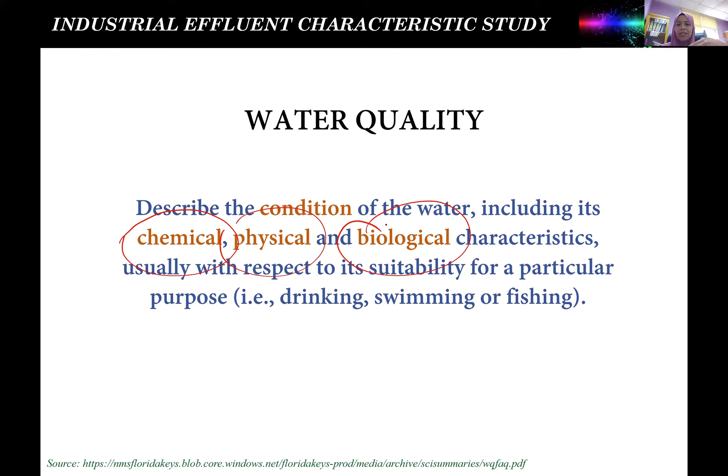Normally, pure water is tasteless, colorless, and odorless. What we call it, usually we call it the universal solvent, right?

When we do analysis, normally we focus on using the standard method for the examination of water and wastewater, we call it APHA. This is actually the standard analytical procedure that quantitatively measures the parameter and qualitatively reflects the impact of the impurities on water.

And if we talk about water pollution, it is actually defined as the presence of water impurities in certain quantities.

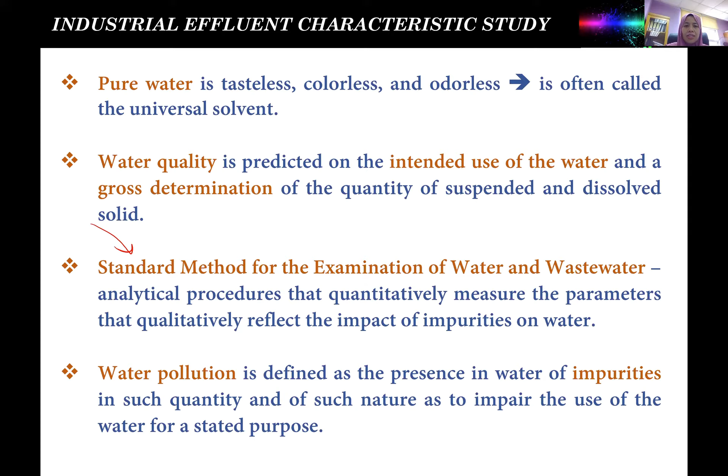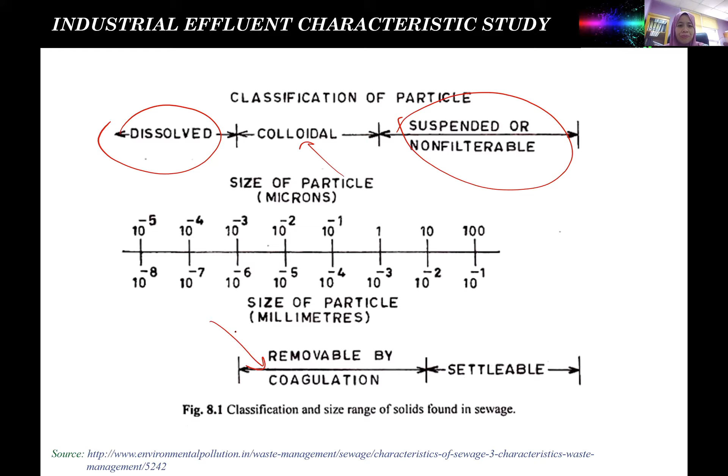Impurities in water, as we discussed before, can be classified as either suspended or dissolved form, and caused by surface nuclei during condensation. That's natural. The most important thing we need to focus on is human activities, industrial and domestic wastewater, for example from agricultural chemicals.

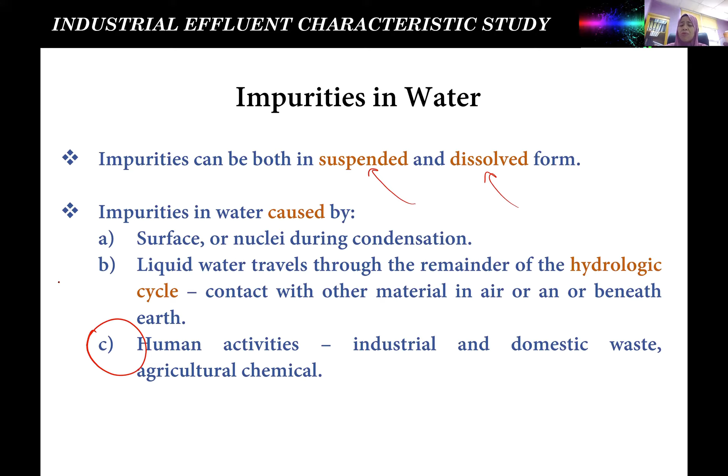So we go directly to the wastewater categories. We have physical characteristics, chemical characteristics, and biological characteristics. Normally, when you talk about physical characteristics, you can sense it, smell it, or see it.

For example, color, that is a physical characteristic. Odor is also a physical characteristic.

But when you talk about chemical characteristics, for example, something you cannot measure or evaluate directly from your naked eyes or smell, for example pH, that is actually a chemical characteristic.

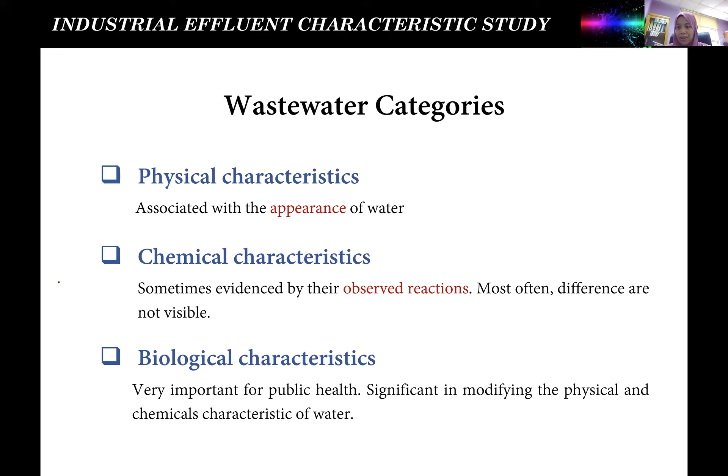Metal, you cannot see the metal inside the water, that is a chemical characteristic. And biological characteristics relate to bacteria and protozoa, for example.

So we go into detail on the physical characteristics. For example, we have temperature, turbidity, conductivity, solids, color, and odor.

So why do you need to measure temperature? The purpose of measuring temperature is actually for the design and operation of biological treatment. For example, if you have quite a high temperature, it will reduce the dissolved oxygen in the aeration process, in the biological process. That's why you need to consider temperature.

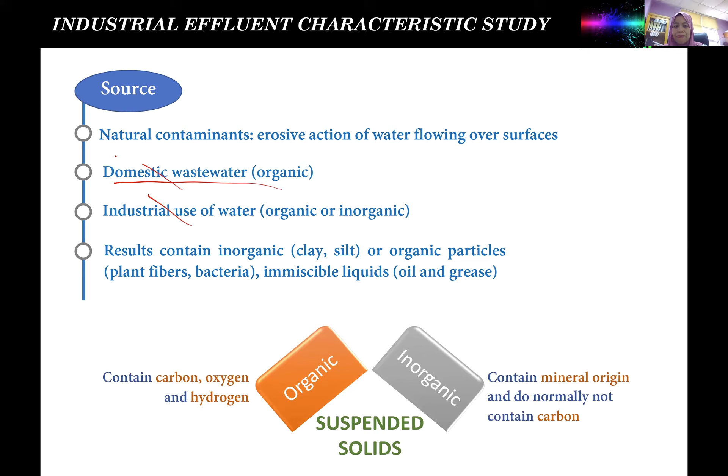Impact of suspended solids: aesthetically displeasing, provides adsorption sites for chemical and biological agents, and may be degraded biologically to produce byproducts. So we use suspended solid analysis to measure water quality and assess treatment processes.

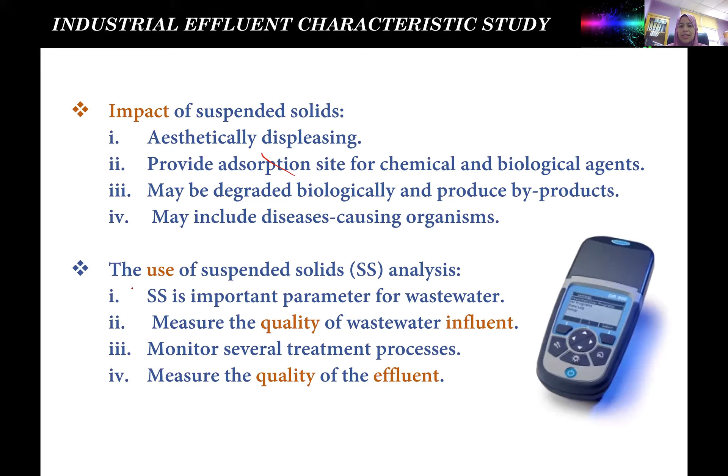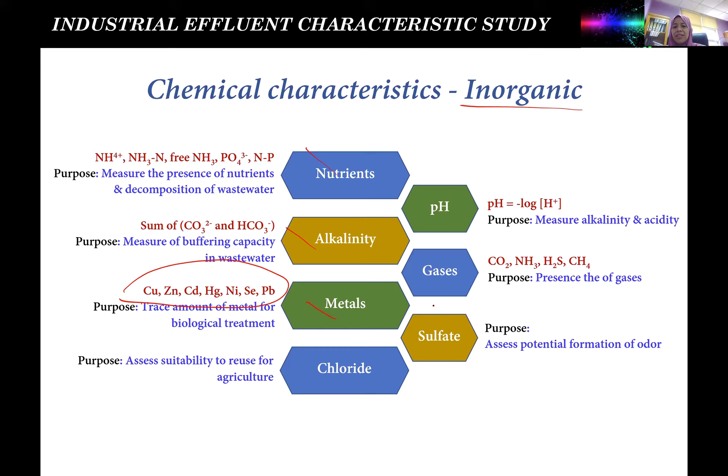That is for organic chemical characteristics. Now for inorganic chemical characteristics, for example nutrients, alkalinity, metals like cadmium, zinc, copper, chlorides, sulfate, gases, and also pH.

If you look into pH, most of you know how to measure pH concentration in wastewater. This is one type of pH sensor equipment we use, a portable pH meter. We normally use the portable pH meter so it's easy to go to the site and do measurements during consultation. In our lab we also have a benchtop pH meter that is more for research, but for consultation we usually use the portable pH meter because it's easy for us to move.

Wastewater with extreme concentrations of hydrogen ion is difficult to treat by biological means. For example, when there are extreme concentrations of hydrogen ion, it relates to acidity. It's very acidic, so you have to adjust the pH first to 7 before introducing this wastewater to the biological process, otherwise it will affect your bacteria in the biological process.

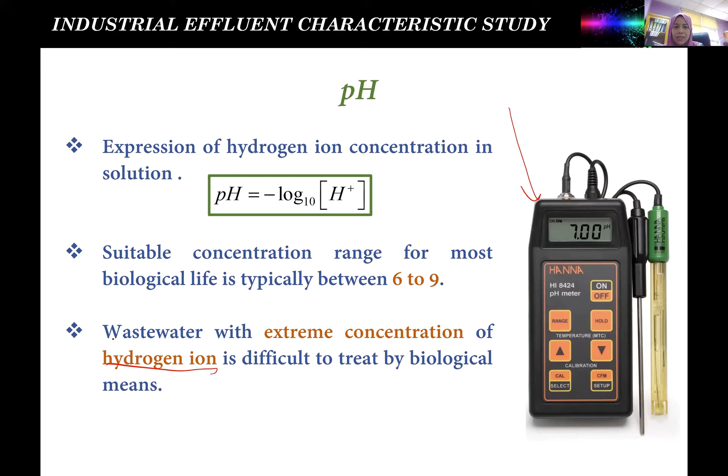Metals are a very challenging parameter to treat in the ITS or wastewater treatment plant. All metals are soluble to some extent, and excessive amounts may present a health hazard. Toxic metals are actually very harmful, although at very minimal concentration. For example mercury, although at very minimal concentration, is actually toxic.

Sources include natural ones, but what we need to control is discharge from industrial and agricultural wastewater. Normally we can measure metal concentrations using AAS, atomic absorption spectrophotometry, or colorimeter, or ICP. If using an APHA method, probably you can use AAS and also ICP. But for us, since we always do consultation at the plant, ITS, we use a handy colorimeter which we bring to the site to measure certain metal concentrations.

Not all metals can be measured using the colorimeter equipment; only certain metals can be measured with it. So if we need to measure a metal that cannot be measured by this equipment, we bring the sample to our lab, because our lab has the AAS and also ICP.

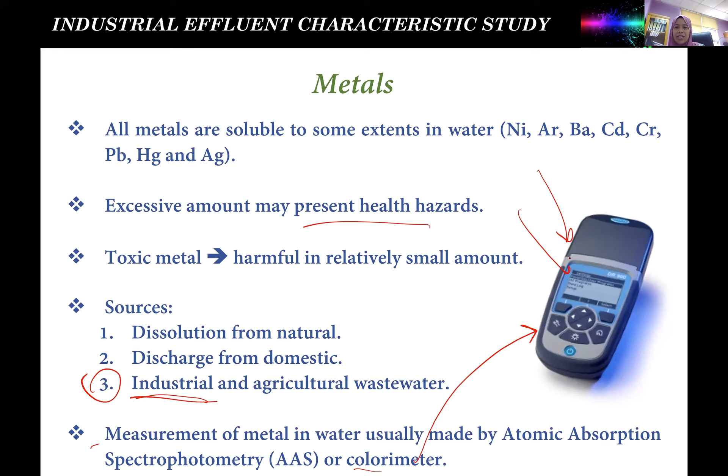This is total nutrient analysis and ammonia. This is actually a parameter that you need to control. It's quite challenging also to control and treat in the ITS, right?

Ammonia is actually a colorless, pungent gas, highly soluble in water. When ammonia dissolves in water, we call it ammonium hydroxide, NH4+, but actually we also have ammonia present by itself in the wastewater. So that is ammonia that we need to treat and remove from the wastewater, or as simple as we can call it, our parameter is ammoniacal nitrogen.

This parameter is also quite challenging to treat depending on the nature of your wastewater.

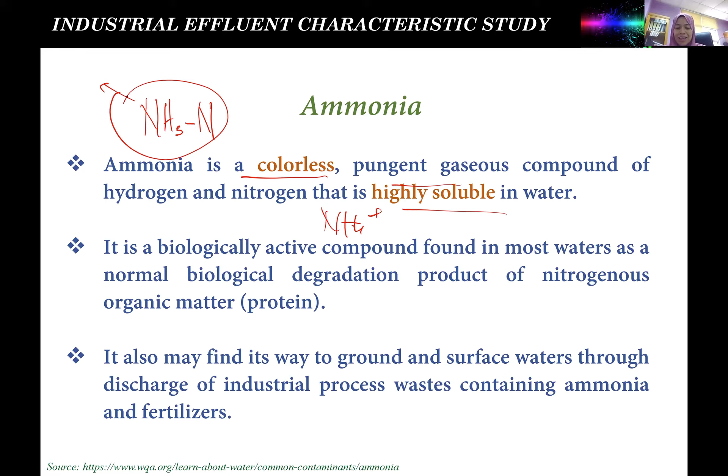Phosphorus is also one of the parameters we need to treat. Sometimes we also use phosphorus as a nutrient in the biological process, but excess use of phosphorus can also contribute to problems in the wastewater.

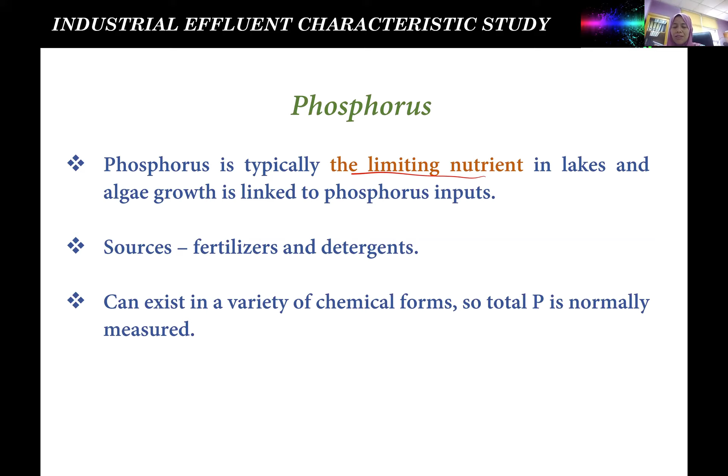Biochemical oxygen demand, BOD, is actually the concentration of organic material present in the wastewater, whereby this organic material can be degraded by bacteria.

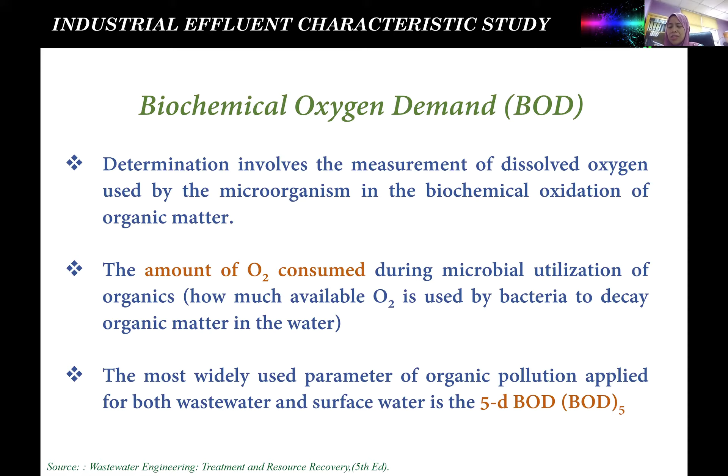So now it is COD. When you talk about COD, yes, COD juga adalah concentrations of oxygen used to decompose organic material. Organic material, either it can be degraded or non-biodegradable. Okay, so kalau kata BOD tadi, organic material yang boleh biodegrade sahaja. Tapi bila COD, dia akan ambil kira organic material either degradable or non-degradable.

So from theory, we know that the concentrations of COD is supposed to be higher as compared to BOD. As simply as we can say, BOD is the subset of COD. So overall in COD you have biodegradable and non-biodegradable. So this is for COD. But for BOD, you just have only biodegradable organic material that can be treated by using bacteria. So that is the difference.

The measurements of oxygen concentration for COD and also BOD is different also. For example, for BOD we are using bacteria. We need 5 days, let the bacteria degrade the organic material, and then we measure the DO before and after. But for COD, we will use a chemical, okay, potassium dichromate if I'm not mistaken.

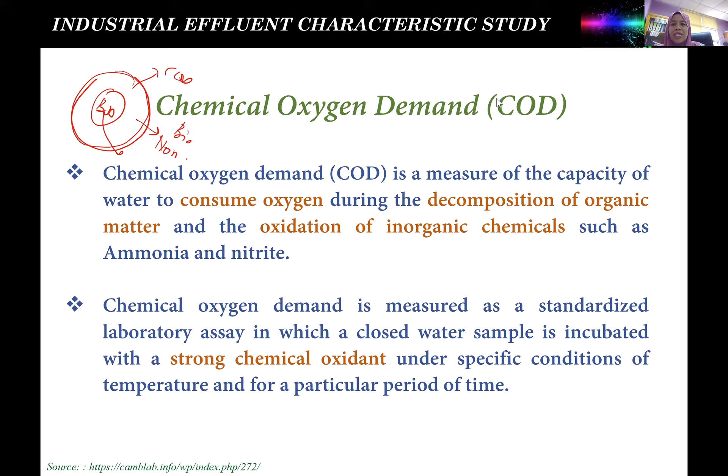Okay, so the commonly used oxidant in COD assay is potassium dichromate. Inilah kaedahnya, okay, kita akan bakar dalam COD reactor for about 2 hours, and kemudian kita akan test concentration tu dengan menggunakan colorimeter.

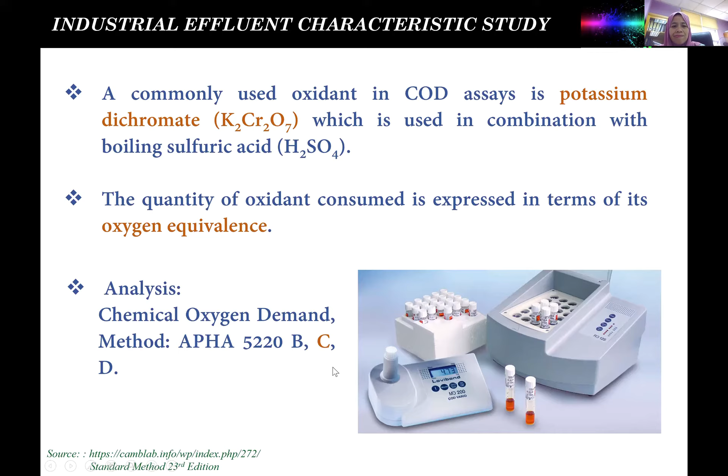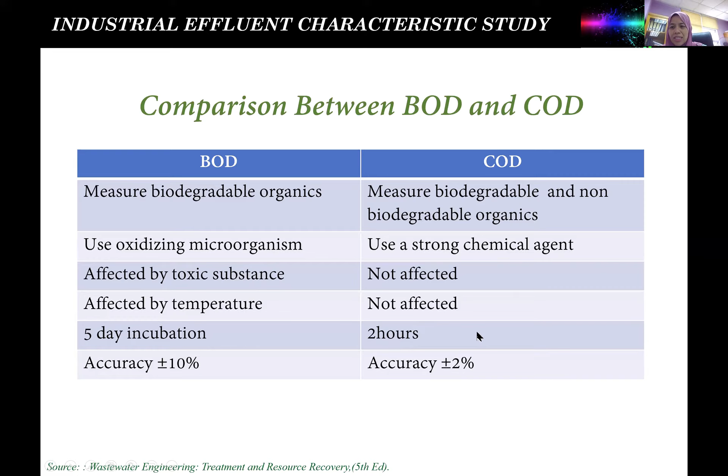So for biological characteristic, we have coliform organisms and bacteria, protozoa, viruses. Okay, so now we talk, that is water quality, okay, and water characteristic.

Now we talk about the industrial effluent characterization study, IECS. So what is IECS? It is actually to identify the quality of effluents, water quality, and it is conducted by professionals. We cannot simply ask any people to do the IECS study.

IECS should be conducted by professionals because there is a method of how to take the samples, okay, how routine, by hours, whether it is composite sampling or grab sampling. So there is a method to take the samples.

And normally in Malaysia, the analytical analysis only can be performed in an accredited lab. Kalau di Malaysia, SAMM meaning Skim Akreditasi Makmal Malaysia. Only this lab can do the analytical analysis and report, presenting the report in the certificate of analysis.

Although we in university have our own equipment, for example AAS, ICP, if our lab is not an accredited lab, the results are not accepted by the Department of Environment. They only accept the results from an accredited analytical lab.

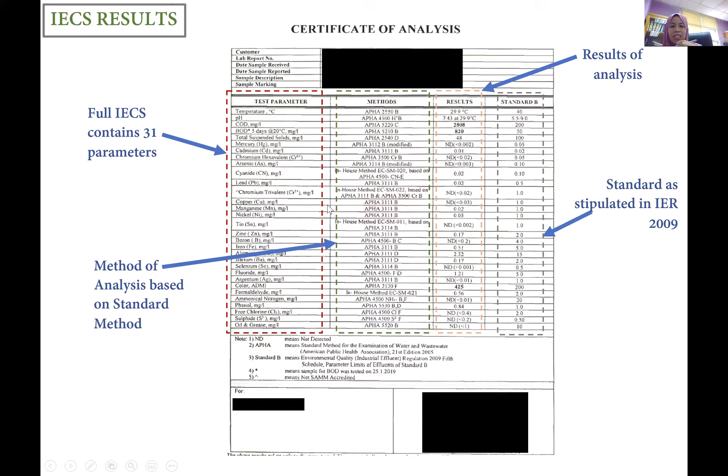So the IECS objective is actually to determine the physical, biological, and chemical characteristics and the concentrations of the constituents in the effluent. So we have the physical, biological, and chemical characteristics here.

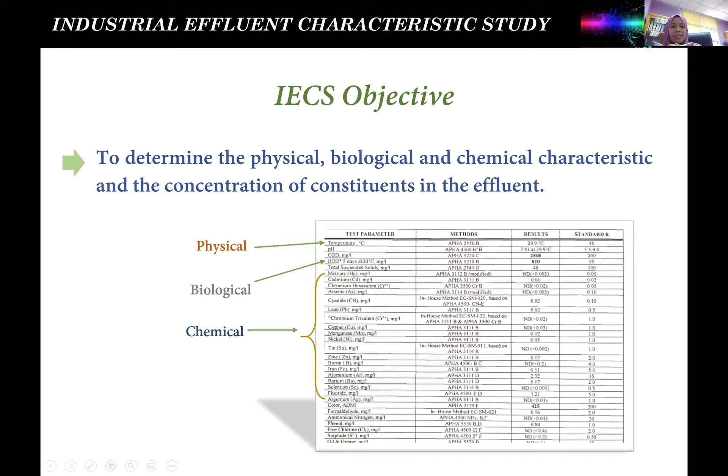And the other objective is to determine the best treatment method for designing the industrial effluent treatment system to comply with the regulation in Malaysia, IER 2009, as stated in the Act EQA 1974.

So normally this is for designing the new IETS. Normally in industrial effluent treatment system, we will have primary treatment, secondary treatment, and tertiary treatment.

Primary treatment is more focused on physical and chemical treatment. Secondary treatment is more focused on biological process. And the tertiary treatment is more focused on advanced treatment process.

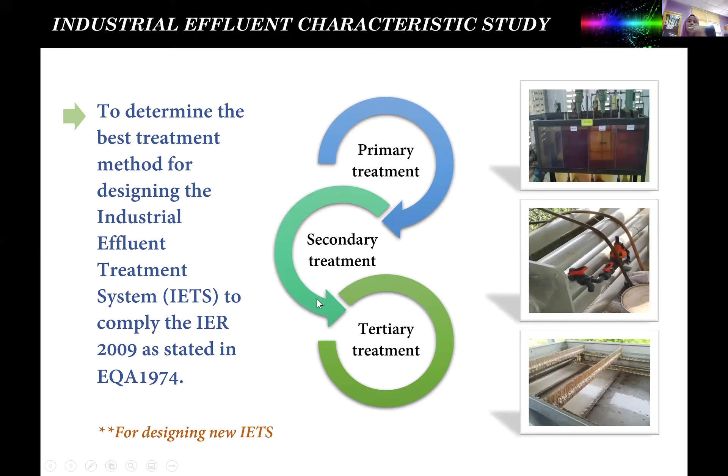So the last objective is to determine the effluent characteristics of the industry at current operations and compare them with the characteristics in the design stage. So for this objective, this is for new design of new IETS.

So for this objective, it is for upgrading the current ITS. For example, the ITS is already there, but the current process in ITS is not capable enough to treat the wastewater with the new current nature of wastewater, so you need to upgrade the current ITS or optimize it.

So what you do is conduct the IECS study, a characterization study, then do the calculations of the HRT, the mass balance, and evaluate the significant parameters. Lastly, from that evaluation, you can decide whether you only need optimization in your ITS or you need to upgrade your ITS. So that's the importance of the IECS study.

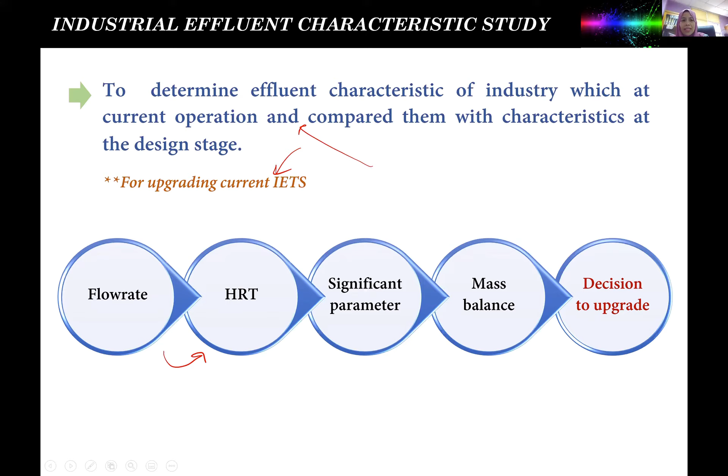Okay, so this is the steps. I just want to share with you the steps of doing water sampling technique for IECS. Normally you will have the equipment, sample collection, and then you need to know sample preservation and sample analysis.

Normally, when we do the IECS study, we just go to the accredited lab and ask them for all the bottles, and this accredited lab has already prepared the preservation solution inside the bottle. So what we do is just put the sample inside the bottle. All the preservation solution is already prepared by the lab, and the lab also will do the sample analysis.

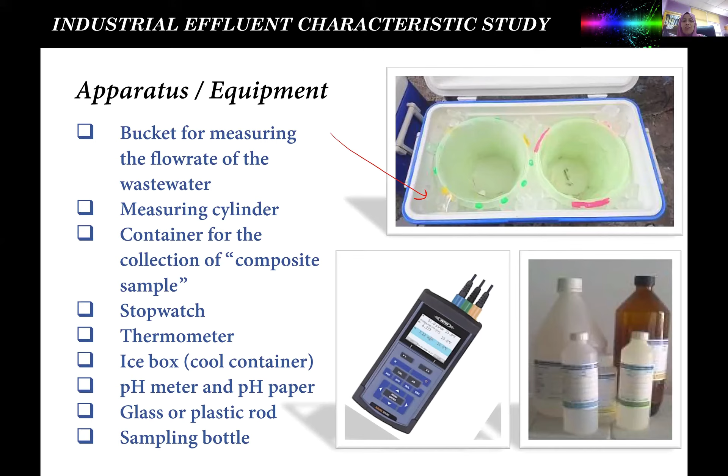For grab samples, you just take a single sample instantaneously and then send it to the lab. But for composite samples, you will take samples over a certain number of hours, for example from 8 a.m.

to 4 p.m., to see the deviation or changes between normal hours and peak hours. You take the sample every 1 hour, accumulate all the samples, homogenize them, and then put the sample in the bottle before sending it to the lab. As for grab sampling, you just take it once at a specific spot and bring it directly to the accredited lab. So that is the difference between grab samples and composite samples.

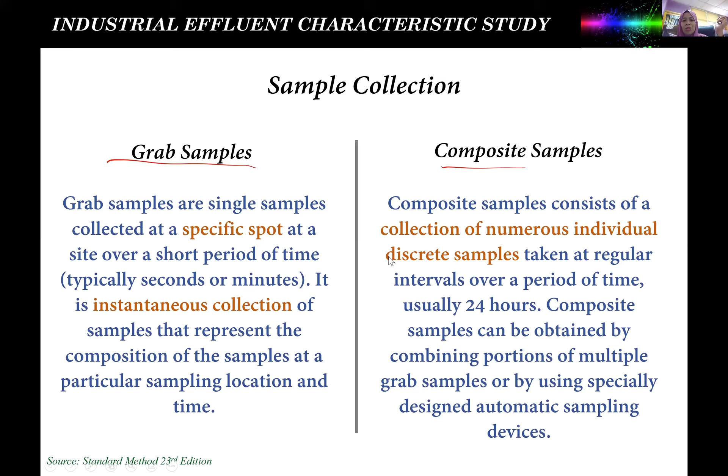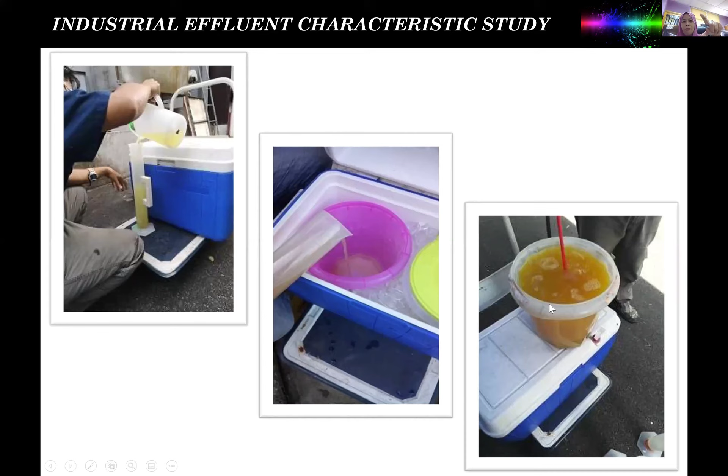So this is how we conduct the sampling for the IECS study. We take the samples and measure the pH and temperature. Then we measure about 1 liter and put it in the bucket, homogenize it, and after that fill in the bottle. So sample preservation and handling is very important in order to ensure your sampling is accurate when you send the sample to the lab.

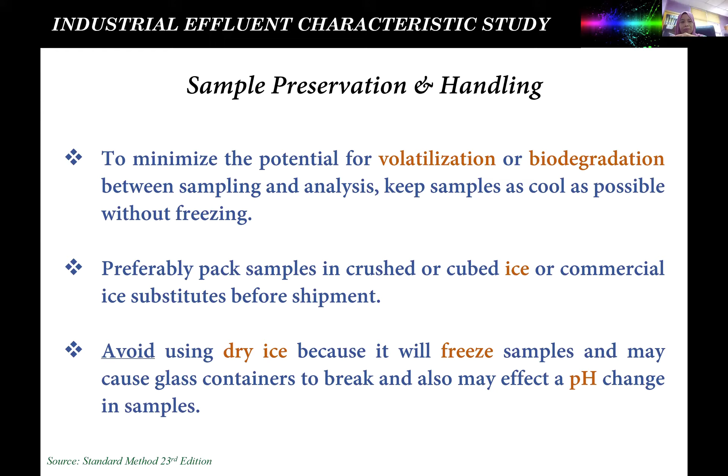So as I said before, keep composite sample cool with ice, set at less than 6 degrees C during compositing. Okay, cool but not frozen.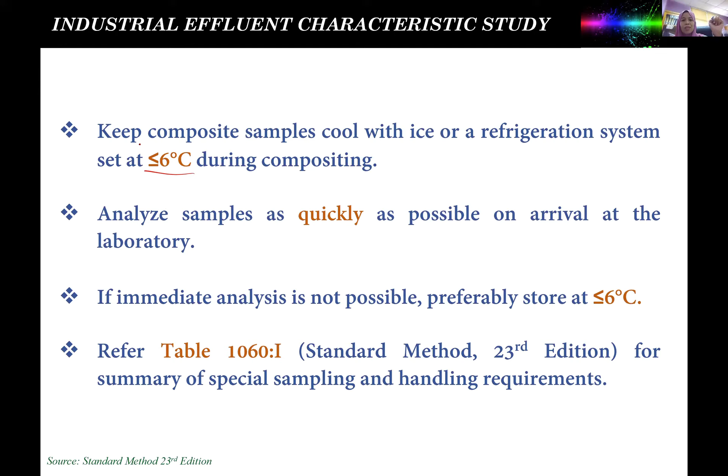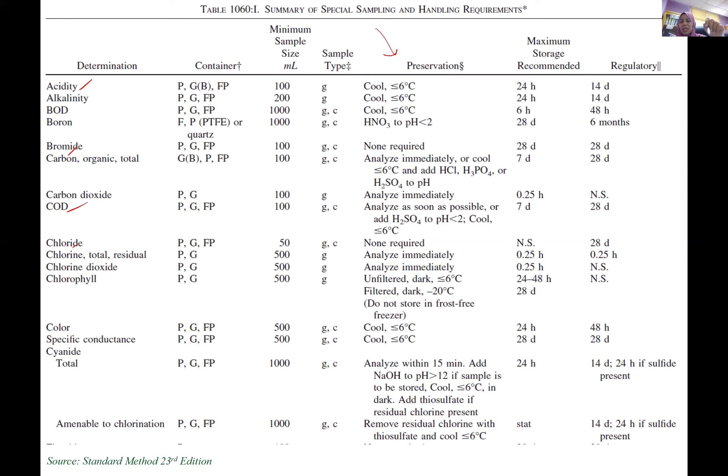Okay, this is the summary of preservation method for acidity, for bromide, for COD, for chloride, okay, and then type of the bottle that you can use, and then sample type in what form. So this is actually, you can get it from the standard book as mentioned before.

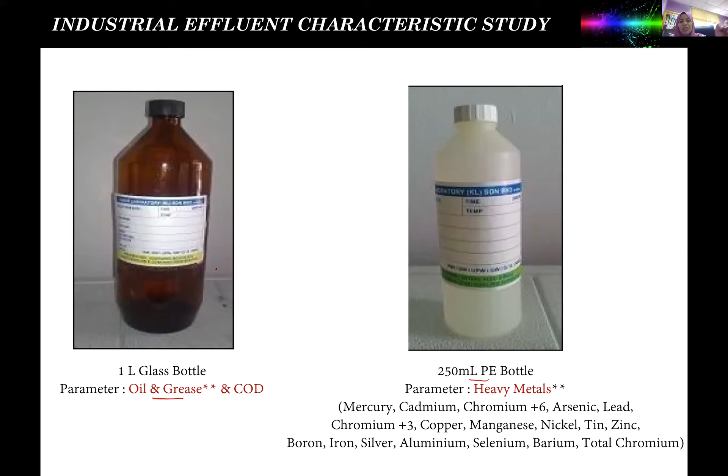Okay, so this is a glass bottle for parameter oil and grease, and this is a PE bottle for heavy metals. So, and then you can see that here. So this is for BOD bottle. Okay. So this is actually all the info related to the industrial effluent characteristic study.

So after you do all the analysis, and then you can have the results, okay, to evaluate the performance of your wastewater treatment, for example, or if you are measuring the process, the water quality at the final discharge. But if you are planning to construct or design the new industrial effluent treatment system, so you will do the IECS at the raw point.

Okay, at the raw point. So you will ask the company, okay, what is the type of water that you want to discharge in the wastewater. For example, the pipeline from the manufacturing, from the washing. So what is the line that you think needs to be treated in your industrial effluent treatment system? Then after that, you will get some point there, and then you mix.

You will do the sampling at that point. Okay, kena ambil kira semua air yang company plan untuk hantar ke dalam industrial effluent treatment system. Kerana water quality ini dia akan mempengaruhi.

Contohnya, kalau kata company kata, okay, hari ini kami hanya nak rawat air dari point ini saja. Okay, and then you do the water sampling, and then you do the study, and then you design. Tiba-tiba company kata, oh, I nak ambil air daripada tempat lain untuk hantar juga masuk di dalam treatment system tu. So the water quality tu dah berubah. Nature of wastewater telah berubah. So you need to evaluate whether your plant can treat this type of wastewater or not.

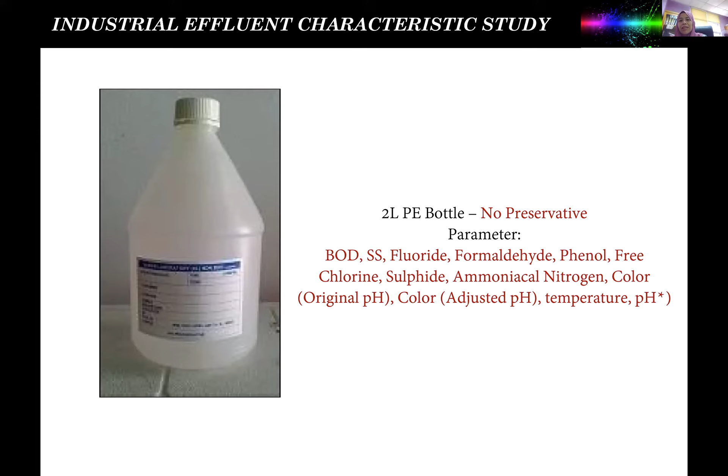Okay, otherwise nanti dia akan berlaku non-compliance kepada air yang telah dirawat. Okay, so that is the first thing that you need to know before you operate the wastewater treatment plant or industrial effluent treatment system.

Another important thing that I want to share with you guys is how to optimize the chemical treatment in industrial effluent treatment system operation. Okay, so process optimization is actually not involving one part.

Contohnya, kita selalu berfikir kita sebagai chemical engineer, jadi kita tahu proses. Jadi apabila berlaku masalah di dalam sistem rawatan air, kita menganggap bahawa dia hanyalah melibatkan proses sahaja. Okay? Jadi kita akan lebih memfokuskan kepada menyelesaikan masalah melalui proses. Sebenarnya dia melibatkan pelbagai faktor lain, bukan sekadar proses saja.

Contohnya, proses optimization dia akan melibatkan chemical proses, mechanical kesesuaian pump, okay, and then jarak pump daripada kawasan treatment, dosing pump especially, dan juga human elements, maksudnya operator yang menjaga plant tersebut, okay, which all must fall in the correct range, okay, of values of the treatment system to be effective and reliable. Okay, maknanya kesemua faktor ini perlu optimize untuk memastikan sistem rawatan air kita dapat dijalankan dengan baik.

Okay, misalignment of this component resulted in inefficiency of the treatment process. Walaupun kita ada proses yang bagus, walaupun kita ada equipment yang sangat bagus, tetapi kalau operator kita ataupun our engineers is not competent enough to handle the treatment process, maka di situ akan juga berlaku, ada possibility untuk berlaku non-compliance.

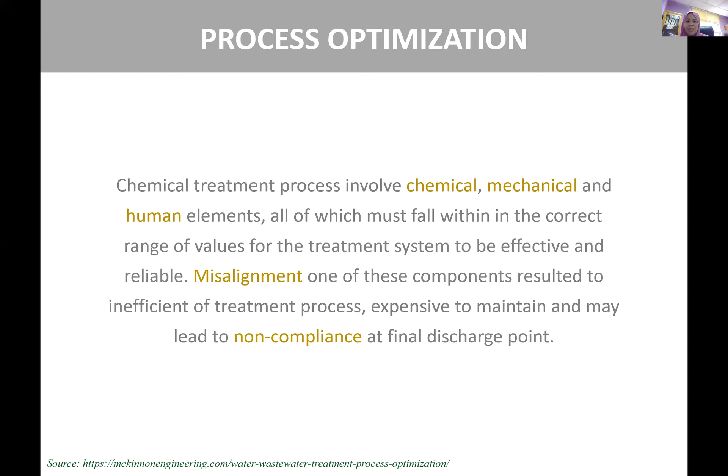Okay. So, the important elements for process optimization in industrial effluent treatment system. So, we have chemical, mechanical, and human. So, it relates to each other. Dia berkaitan. Okay. Dia berkaitan.

So, di Malaysia, setiap industri wajib ada seorang competent person. Okay, that we call a competent person yang perlu menjaga ataupun perlu ensure that the IETS operate in sound engineering system. Okay, maknanya dia operate dengan baik untuk memastikan treatment plant comply, okay, dengan standard.

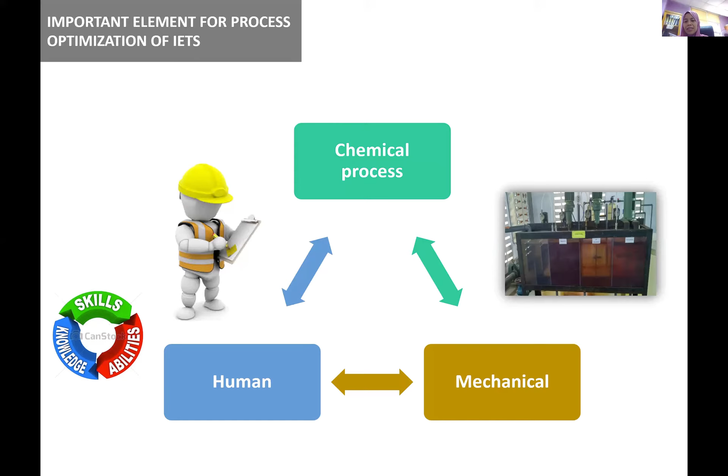Okay, so I share with you guys the general steps for process optimization of IETS. So the first one is, apa you kena buat adalah evaluations of process parameter. Katakan, for example, you dapat satu project to optimize or to relook into one of the wastewater treatment in one industry. So apa you kena buat adalah, first, go to the site first.

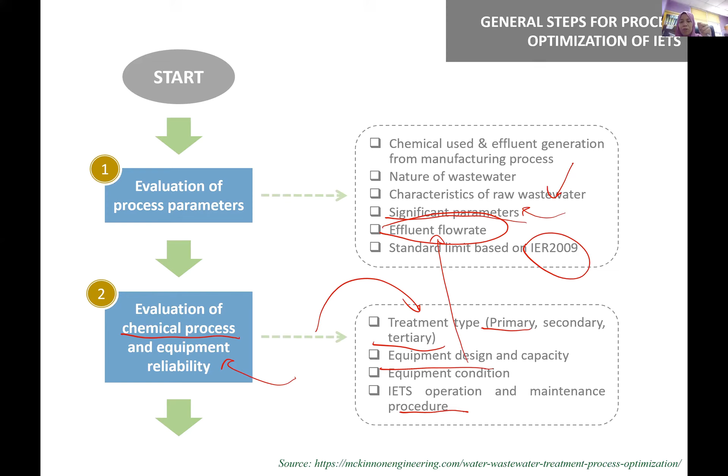Next, optimization of IETS - you need to do process control and performance monitoring, as I said before. Use the right instrumentation for the selected process parameter, and then do the performance monitoring. In Malaysia, we have our guidance document for performance monitoring from the Department of Environment. We have to use that guideline to conduct the performance monitoring, and the DOE will check on this record - collecting sample, analyzing and reporting based on DOE requirement.

DOE meaning Department of Environment, through the system OER, online environmental reporting. Every week we will have our treatment, and every week we will send one of our samples to the accredited lab, and the accredited lab will release the result to us, and we will report, insert all this value in this online environmental reporting system. So the DOE will monitor our IETS performance through the system, and they can come if they want to come anytime.

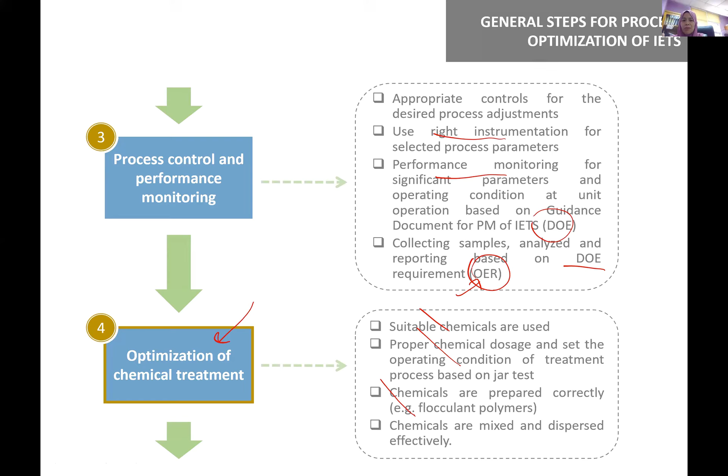And chemicals are prepared correctly - for example, flocculant polymers. Sometimes in industry they use dilution, they dilute the chemicals and put it in the chemical dosing tank, and the pump will pump the chemical into the treatment tank. So when the concentration of chemical is not properly prepared, and it varies - sometimes they prepare 4%, sometimes 3%, while the dosing pump is set at the same 100 ml per minute, for example - the quality of treatment will change, not consistent. So that will also give an effect to the treatment process.

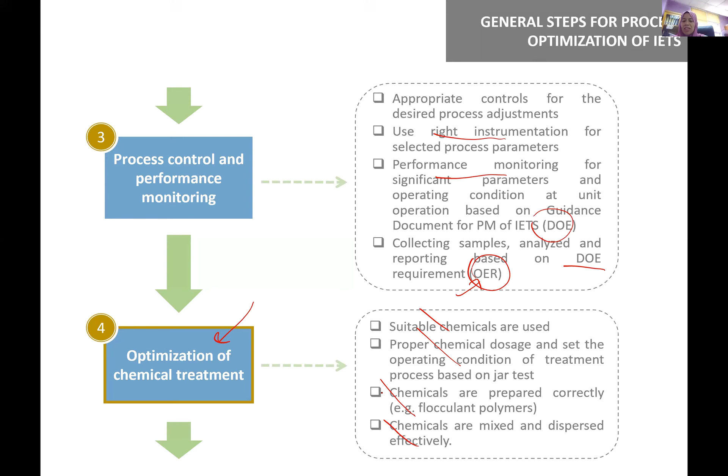And chemicals are mixed and dispersed effectively, as I said before, the functions of the mixer.

And the last one is assessment of operator knowledge. So to optimize the plant, you need to ensure that your operator knows or understands the manufacturing process and chemistry basics, and the treatment plant process fundamentals, and the target range of the control parameters. They know that the concentration of the final discharge should be less than the standard concentration.

And some of the equipment is using online control now, so they need to know how to monitor or handle the control system, and then they are fast to respond to the upset condition. Like I told you before, sometimes suddenly the mixer rosak - so what should you do?

Kadang-kadang pump is not working or there's no flow at one tank because of valve locking. Sludge dah banyak dalam valve tu. So what you have to do, you need to open the valve and then discharge all the sludge manually. So dia kena tahu nak buat benda tu semua. They should know how to do it.

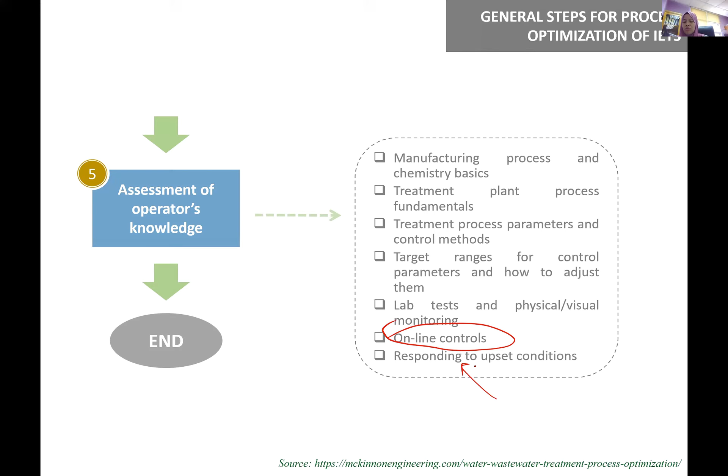Okay, so optimization is required when there is non-compliance at the final discharge point, and also to minimize the cost of the chemical. When you know the exact value of chemical dosing, then you can minimize the cost of the chemical.

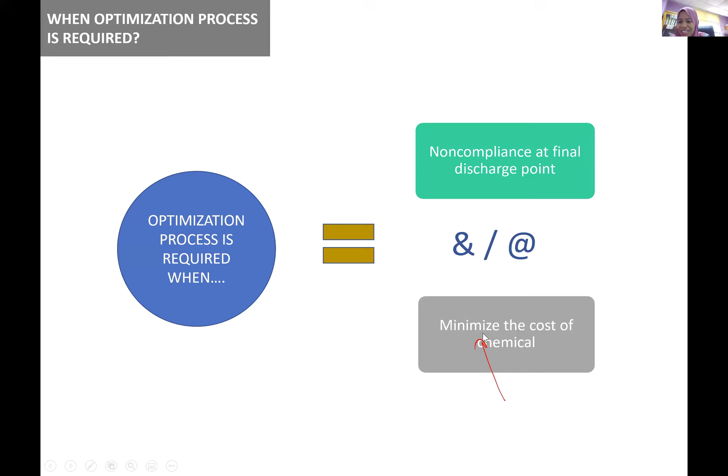Have I used the 50 minutes or have I exceeded the 50 minutes, Dr. Dewi? Apakah masih banyak? I can continue and I can stop. Teruskan dan saya boleh berhenti. Continue, you can continue. Okay, thank you.

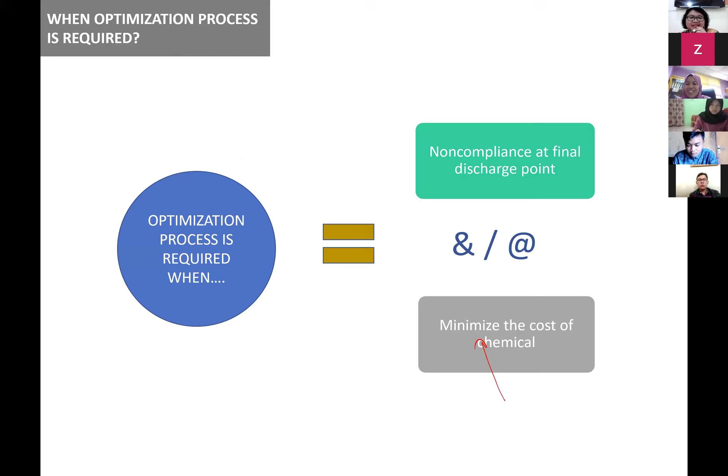All right, so this is how we practice our optimizations on the chemical treatment. So the first thing we have to do is understand the nature of wastewater. Berkali-kali saya sebut the nature of wastewater sebab this is different as compared to other process.

Sometimes wastewater ni nampak senang je. You ada 3 treatment, primary, secondary, tertiary. But the challenge is actually you will face the different nature of wastewater kerana dia adalah waste. So that is the challenge part.

Second, you have to understand the chemical treatments of IETS. For example, some companies are using a continuous process with coagulation, flocculation, but it is a continuous flow. Some companies are using a batch process. So handling batch is not similar as compared to handling continuous process. That is the thing that you need to understand.

For example, if you are doing batch, tak ada masalah because you can calculate whatever yang di dalam jar test tu, you just put the values dalam batch tu, senang, sama je prinsipalnya dengan jar test. But when it comes to continuous, you do the jar test in the lab as a batch process, but you want to operate the plant, the chemical treatment in the plant as continuous. So that is the challenge whereby you need to know how to set the dosing pump at the treatment plant using the data that you obtain from the chemical treatment jar test process.

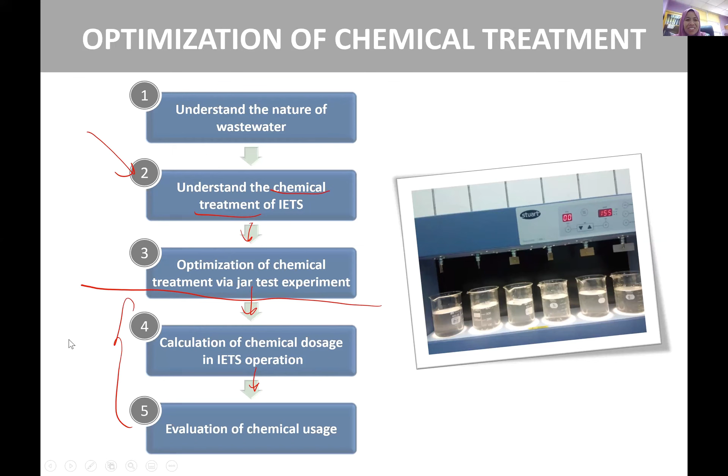Okay, now we go to understanding the nature of wastewater. So for example here, this is raw wastewater, you can see we have some sludge. Nampak partikel terapung dalam air ni. Ini air daripada raw sebelum masuk treatment lagi. So you kena tengok any presence of solid particle or any highly suspended solid in the incoming wastewater. So kalau ada, macam mana you nak treat dulu sebelum masuk dalam chemical treatment. Kalau you masuk terus dalam chemical treatment, there's a lot of problems akan berlaku kat situ. Okay, so itu benda pertama.

Kedua, the pH of the raw effluent, is it inconsistent or consistent? Varies. Contohnya hari ni pH yang masuk pada raw adalah 5, esoknya 6 pH, lusanya 7 pH. So if the pH is not consistent, it's quite challenging for us to set the dosing pump.

Okay, and then latest IECS, maksudnya adakah maklumat ataupun water characteristic study yang diberi pada you semasa buat consultation tu adalah latest ataupun itu adalah 5 tahun lepas, 3 tahun lepas. So is there any change in IECS? Depend on effluent generation side manufacturing as compared to the IECS at design stage. Mungkin masa dia buat design stage tu dia gunakan chemical A, so this is the waste produced from chemical A. Along the way, the company operating bertukar chemical B, so mungkin the quality of concentration impurities dah bertukar. So you tak boleh guna the previous IECS in order to advise the company, because you need to advise the company based on the latest IECS. Condition dia tak sama.

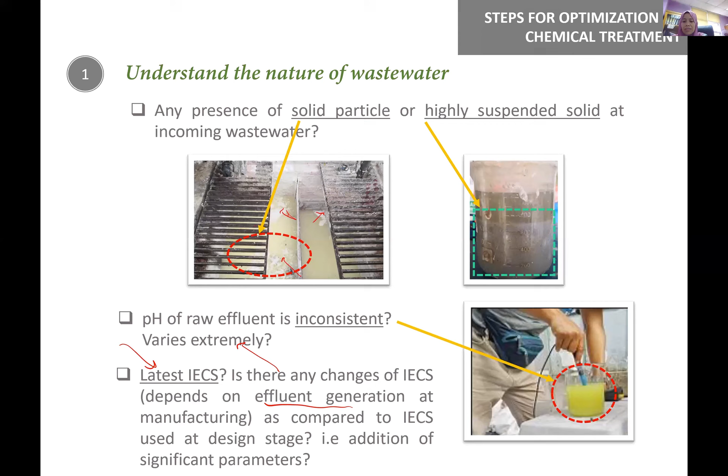And then second, understand the chemical treatments of IETS. You need to understand the process flow of your chemical treatment.

Previously we operated all of these unit operations, but currently, due to the current concentrations of raw wastewater, I can manage to stop the biological process, and just operate chemical and advanced treatment. It is adequate enough to treat our water and comply with regulation, so we save a lot of operational costs. The tank just operates as a holding tank only, with no bacteria inside.

So, understand the flow of the chemical treatment, whether it is batch or continuous, the hydraulic retention time, and the sequence of treatment, whether you need to dose coagulant first and then do pH adjustment and flocculation, or do pH adjustment first and then put the coagulant and do the flocculation process.

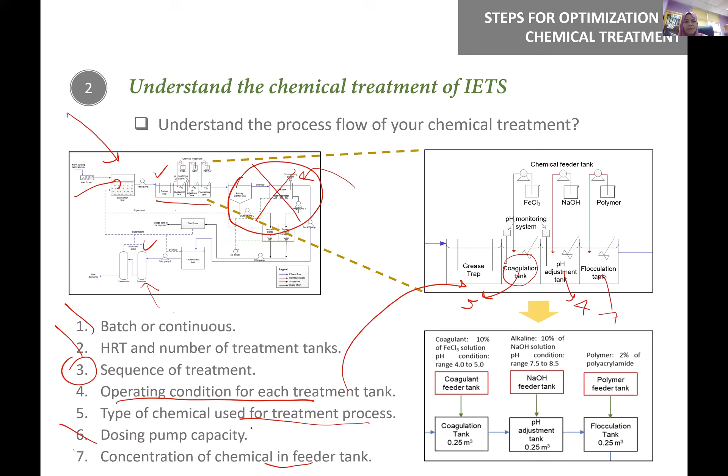So this is how we conduct optimization of the chemical treatment via jar test experiment. The key to selecting raw wastewater - normally we analyze the worst case condition, and we do the jar test analysis for 3 consecutive days to ensure the changes in the nature of this water are accounted for.

Then we can do the optimization study for selection of coagulant or selection of operating conditions. We need to consider imitating the chemical process in the industry, and understand the limitations from the industry - for example, the cost or the space. Let's say you have a solution that requires space, but the industry doesn't have the space, so your solution is not suitable for that limitation in the industry.

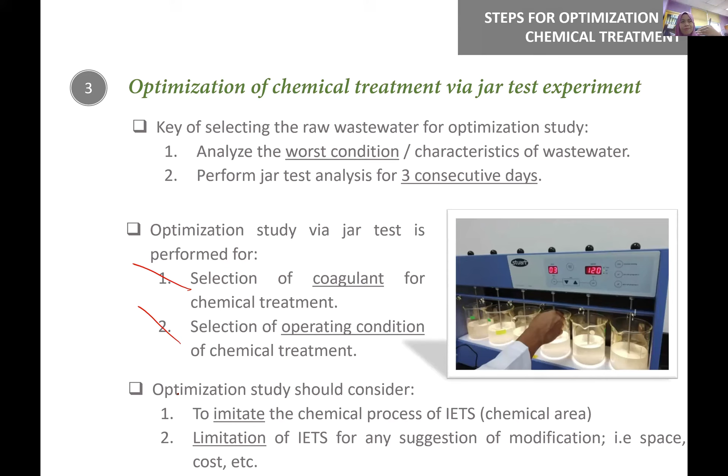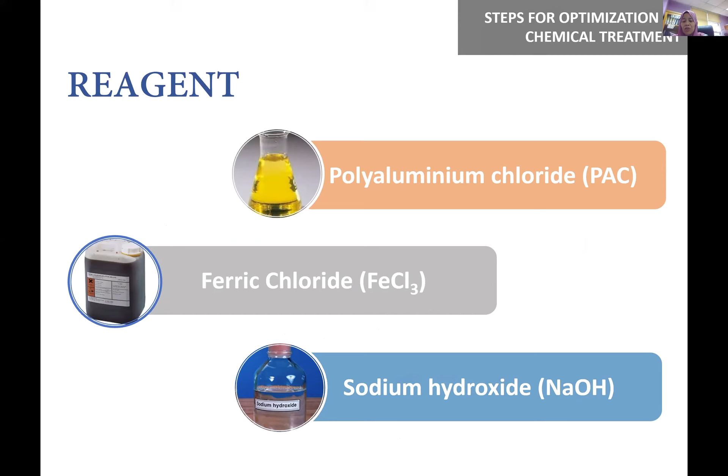So before you give advice, you need to know the limitation first. Normally when we do jar test, we need to know the reagents, apparatus, analysis equipment, the steps, and the data analysis. So these are the chemicals we use: PAC, ferric chloride, sodium hydroxide; apparatus: jar test, beaker, pipette; equipment: spectrophotometer, colorimeter, and methodology.

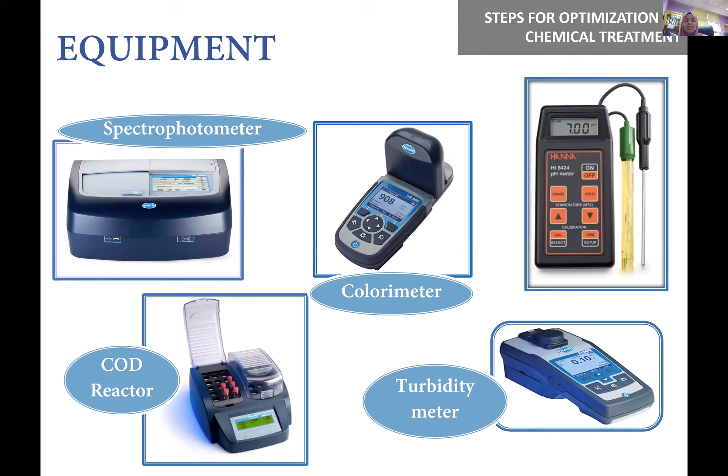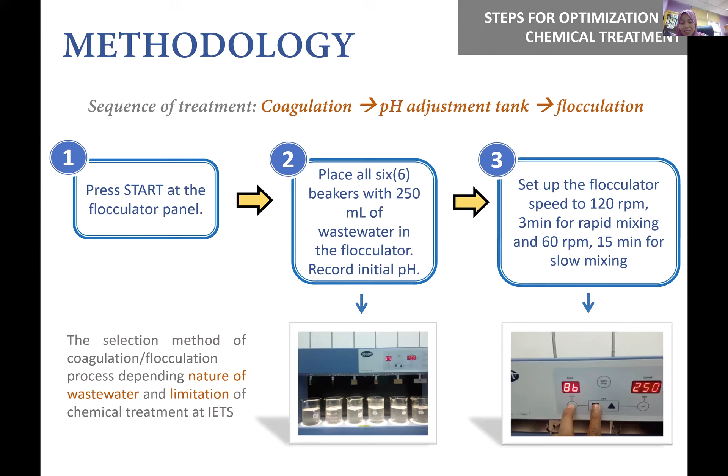I think most of us are doing similar things - we do the jar test experiment to conduct the optimization study, so I think I can skip this part. Okay, so that's all for now.

So this is actually the results for our plant. From the concentration versus pH, we can find that we produce the lowest concentration at the optimum condition at pH 4. Therefore we set our plant for the coagulant process to maintain pH 4, and then after that we add some caustic or sodium hydroxide until we obtain pH 7, and after that we add a polymer. That's how we complete our chemical treatment process in our treatment plant.

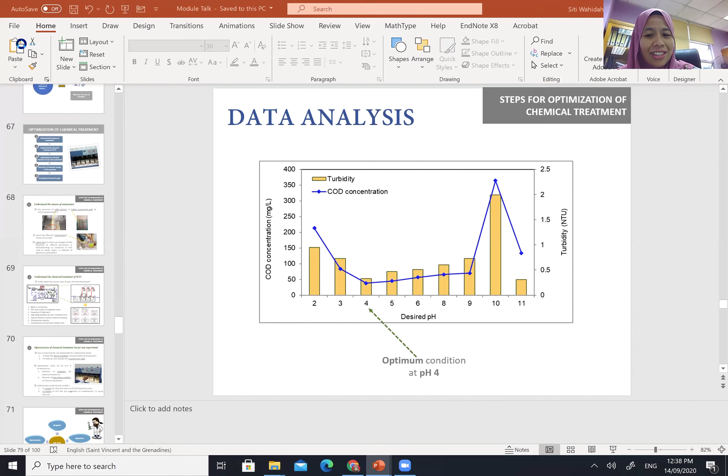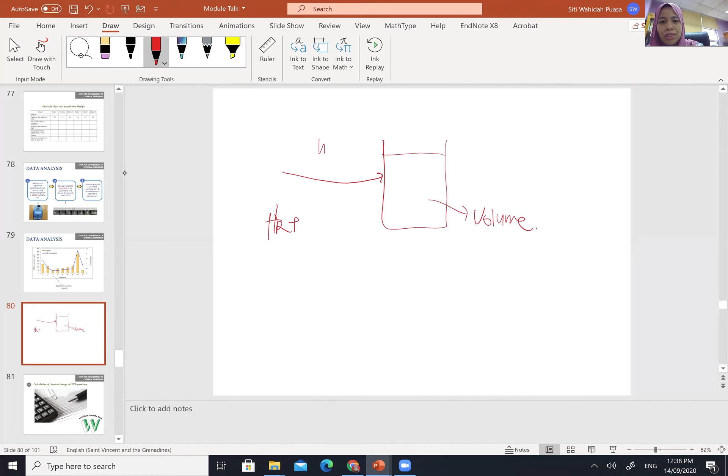Thank you, Doctor. Okay, can I sketch here? I'll still share my slide. Now, when you talk about the effluent flow rate, how does it affect your treatment process? You have the flow rate here, and then you have the volume of the tank. Normally in a wastewater treatment plant, when we design the system, we depend on HRT, hydraulic retention time. The flow rate unit is, for example, meter cube per hour, and volume is meter cube. So hydraulic retention time is equal to volume divided by flow rate.

For example, when I talk about the coagulation process, normally as a rule of thumb, they say coagulation is adequate enough when operated between 2 or 3 minutes duration HRT. But for my case, based on experience, we tend to design the coagulation process for about 10 or 15 minutes HRT. Just put 15 minutes, and then you have V and you have Q.

So your volume is constant, but your flow rate will vary. Let's say you introduce a high flow rate here. What will happen? The HRT will decrease. When HRT decreases below our rule of thumb, normally the chemical reaction does not occur perfectly.

For example, you introduce a high flow rate, it's hard to calculate exactly, but let's say you only end up with 5 minutes of reaction time in the tank, as compared to the intended 15 minutes. So not all organic material will be reduced effectively within that 5-minute period.